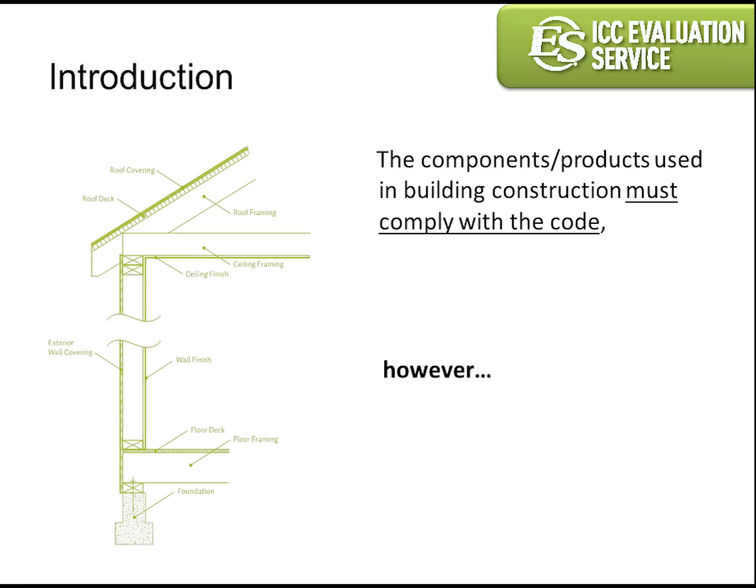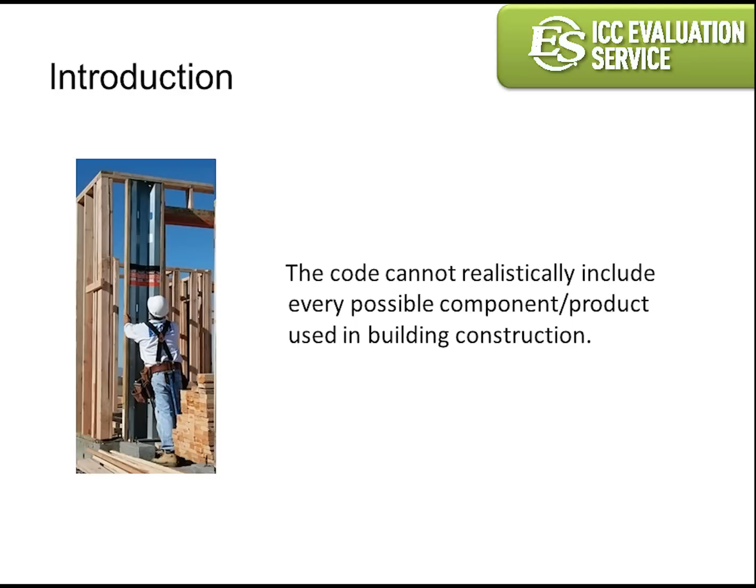The reason is that the building code cannot possibly include every product and component used in modern building construction. If the building code included every possible construction product currently in the marketplace, the code would be unmanageable in size and scope, and maintaining such an extensive code would be very difficult and impractical.

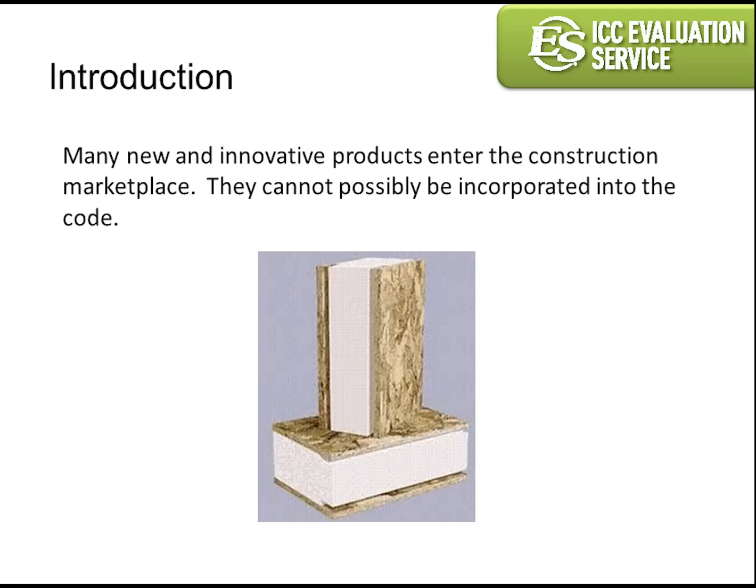Although new building codes are published every 3 years, many new and innovative products continually enter the construction marketplace. There are thousands of manufacturers who produce various new and innovative products that influence and shape building construction trends, but the building code cannot possibly include every product and component used in modern building construction.

If all these products are not specifically covered in the building code or the standards referenced in the building code, then how are they approved for use in buildings?

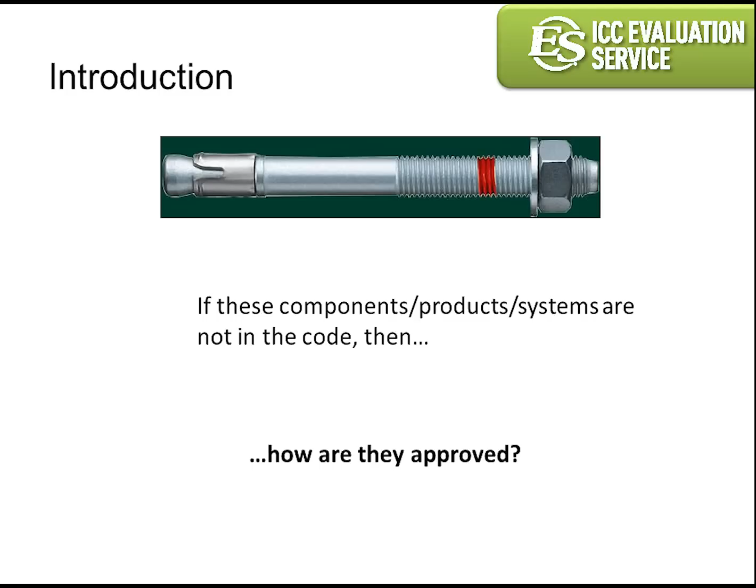I'm sure we've all seen these products used. Some of you may have even specified these products in your building designs, and some of you may have approved these products in buildings in your jurisdiction. So the question is, by what process are these alternative products approved to be used in building construction?

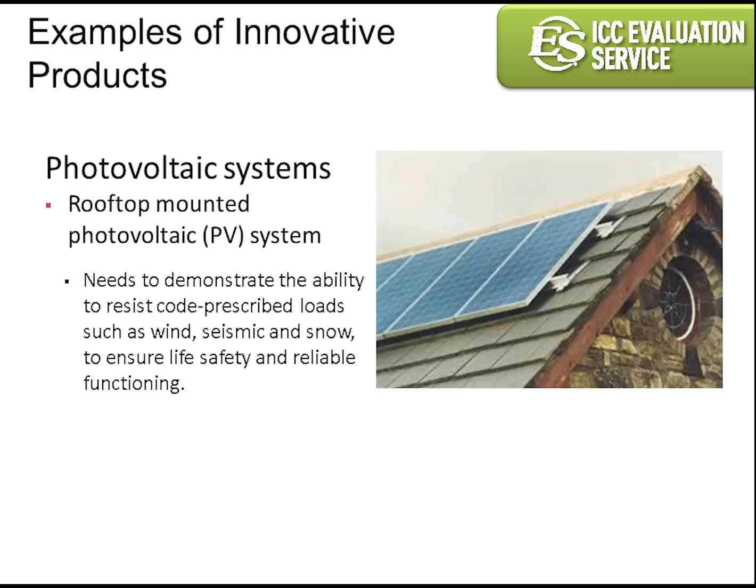A good example of an innovative building product that is gaining momentum in both residential and commercial use is rooftop-mounted photovoltaic systems, referred to as PV systems. PV systems are supported and connected to the structure by a framing system. For life safety issues, it is important that the PV framing system demonstrate its ability to resist code-prescribed loads such as wind loads, seismic loads, and snow loads.

Another example of an innovative building product is the Building Integrated Photovoltaic System, simply referred to as BIPV. This system functions both as an alternative energy-producing system and a code-compliant component of the building envelope.

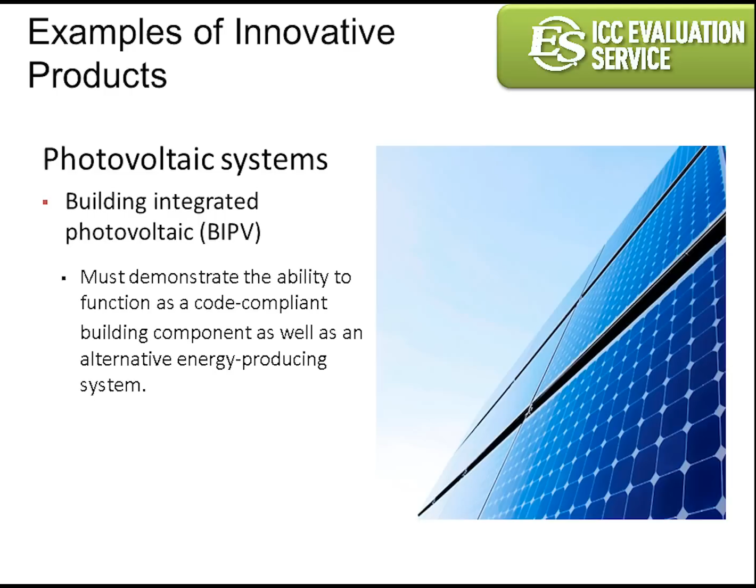Let's start at the beginning with Chapter 1 of the IBC, which contains administrative provisions. Section 104.11 for Alternative Materials, Design, and Methods of Construction states, "The provisions of this code are not intended to prevent the installation of any material, design, or method of construction not specifically prescribed by this code." This means that the building code allows products that are not specifically covered in the code, provided that the material or method is equivalent to that prescribed by the code in terms of quality, strength, durability, and safety.

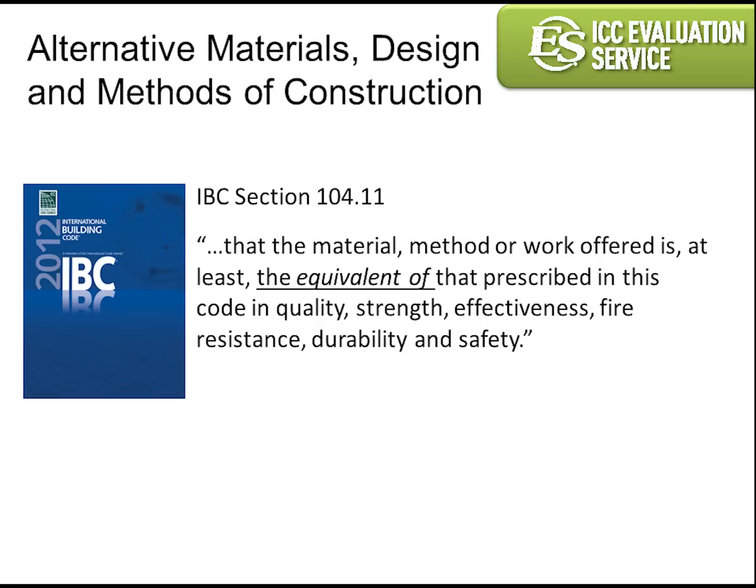And further provided that the alternative has been approved. So the next question is, what does the code mean by approved? Approved by whom? IBC Section 202 defines approved simply as acceptable to the code official or authority having jurisdiction. Section 104.11 of the IBC states that the alternative shall be approved where the building official finds that the alternative complies with the intent of the code.

This leads to even more questions. Specifically, what kind of information must be submitted to the building official in order for the official to determine that a product complies with the code?

The section further states that supporting data in the way of valid research reports from approved sources may be necessary to assist the building official to determine that the alternative complies with the code. What are valid research reports? What are approved sources? Who decides if the supporting data and research reports are valid and from approved sources?

The next question is, who has the responsibility to review and approve research reports and test data for alternative products? The answer is the building official. Section 104.11.2 of the IBC states, the building official shall have the authority to require tests as evidence of compliance.

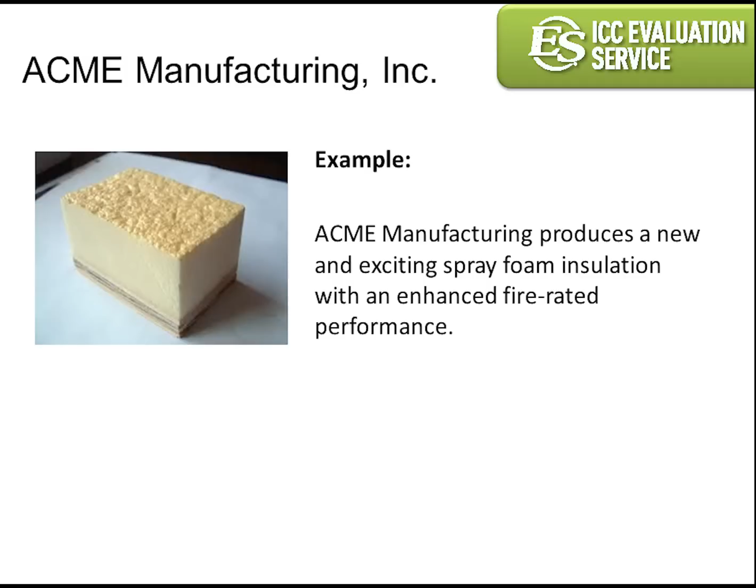According to Acme, their spray foam enhances air quality, is easy to apply, is safe, is energy efficient, and it's economical. However, the burden for the building official is to determine if these claims are true and approve or disapprove the Acme spray foam insulation.

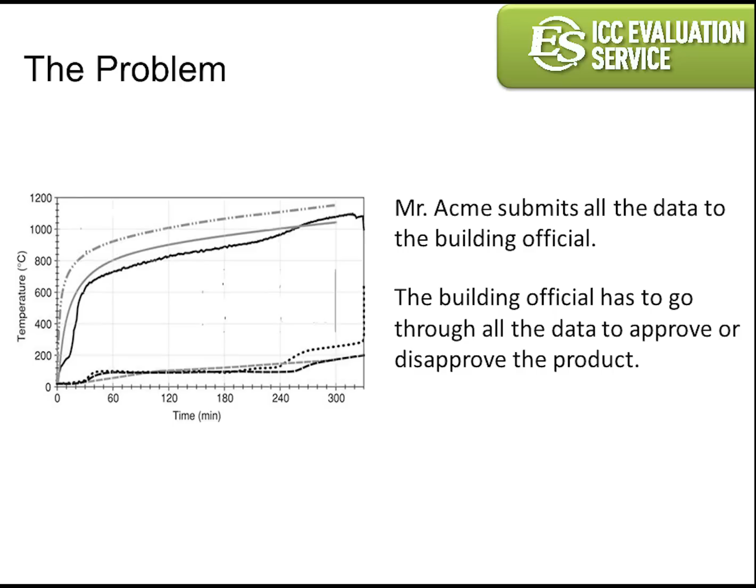In accordance with the code, an Acme representative submits the engineering calculations and test data to the building official. The building official replies, 'What do I do with all this data?' At this point, the building official needs help. Who can help? There is one very simple solution for the building official and Acme.

If Acme Manufacturing had an ICC-ES evaluation report for their spray foam insulation, the building official would not have to review the engineering calculations and raw test data. The engineering and test data would have already been reviewed by ICC-ES staff engineers, and the ICC-ES evaluation report would describe the spray foam product and specify installation requirements, limitations and restrictions that may apply, conditions of use, evidence submitted by Acme, which was the basis for determining code compliance, and an ongoing quality control program with inspections.

This example illustrates how ICC-ES evaluation reports can significantly reduce the burden on the building official and the manufacturer.

ICC Evaluation Service is a nonprofit subsidiary of the International Code Council. ICC-ES has direct access to those who maintain the code. ICC-ES is accredited by ANSI as a product certification body under ISO Guide 65. As a certification body, ICC-ES creates evaluation reports and listings that demonstrate a product's compliance to the codes and standards. ICC-ES has more than 80 years of experience in evaluating products for code compliance.

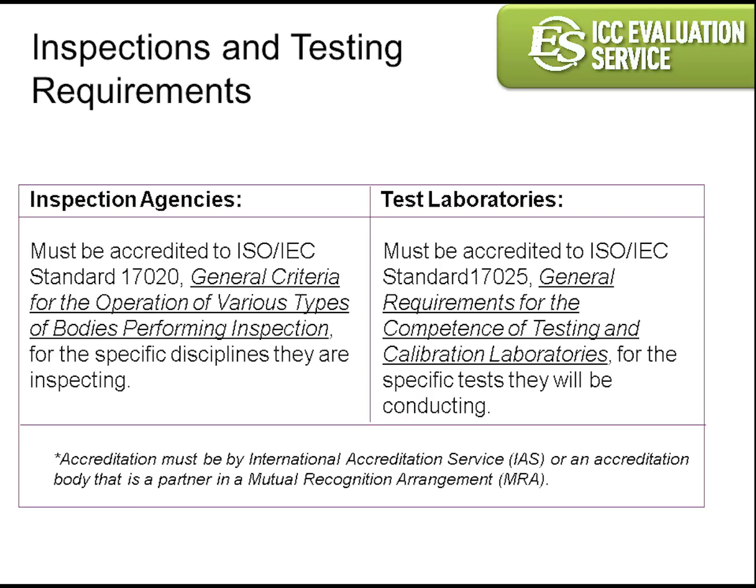The inspection agencies and testing labs used in the development of ICC-ES evaluation reports must be accredited. Inspection agencies must be accredited to ISO/IEC Standard 17020 for the specific types of products that are to be inspected. Testing labs must be accredited to ISO/IEC Standard 17025 for the specific tests that are required.

Another basis for the evaluation of a product is ICC-ES acceptance criteria. Where there are no applicable provisions in a code or standard, or where the code or standard is not clear, specific acceptance criteria are developed to serve as the basis for product evaluation.

The basis used for evaluation is shown in ICC-ES reports under Item 6, Evidence Submitted. Item 6 indicates the acceptance criteria and/or standard used as the basis for evaluation. Acceptance criteria, also referred to as ACs, provide an objective measurement for building products to meet the minimum performance requirements of the code.

ACs are only developed when a product is not clearly covered under the code, when industry raises concern about the product's requirements, or when new criteria is deemed necessary by the applicant or the ICC-ES Evaluation Committee.

How are the ACs developed? ACs are developed by the ICC-ES technical staff in consultation with the report applicant, as well as input from technical experts and interested parties. Three times a year, the ICC-ES Evaluation Committee holds public hearings to consider proposed acceptance criteria.

Proposed acceptance criteria are posted on the ICC-ES website for 30 days prior to the Evaluation Committee hearing to allow comments from interested parties. In some limited cases, the acceptance criteria is balloted to the Evaluation Committee without a public hearing. All approved acceptance criteria are posted on the ICC-ES website for anyone interested in ICC-ES reports.

The final ICC-ES report provides code officials and specifiers, such as engineers and architects, the assurance of technical accuracy, code compliance, consistency, and fairness. A product that has undergone a successful evaluation may place the mark of conformity on the product or packaging. This allows the code officials and specifiers to quickly see that the product has undergone the ICC-ES evaluation process.

ICC-ES newly issued evaluation reports are valid for specified time periods. New ICC-ES evaluation reports are renewed after 1 year. After that time period, the manufacturer has the option to renew for 1 or 2 years. The manufacturer can submit an application to make revisions to the report at any time.

Now let's take a closer look at a sample ICC-ES report. The slide shows the information provided on a typical ICC-ES report.

The Construction Specifications Institute, or CSI, standard filing number is given. The report holder's name and contact information is listed. The subject of the report gives the specific product covered by the report. The scope of the report and applicable codes is indicated.

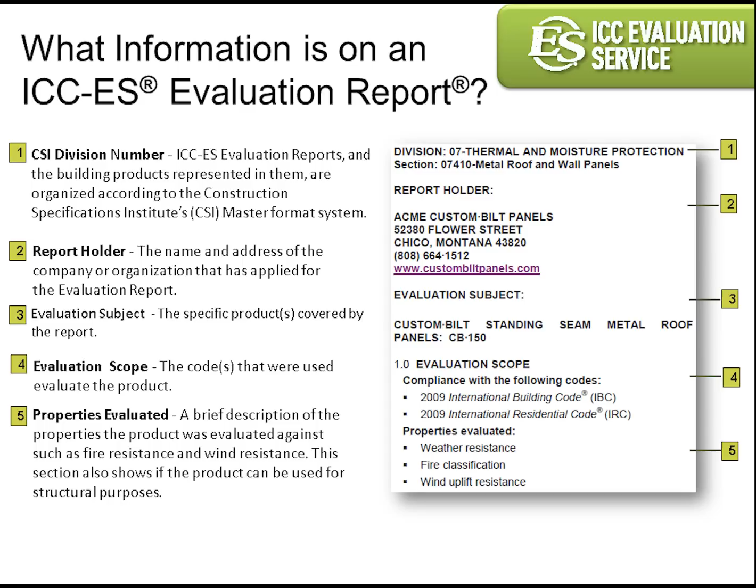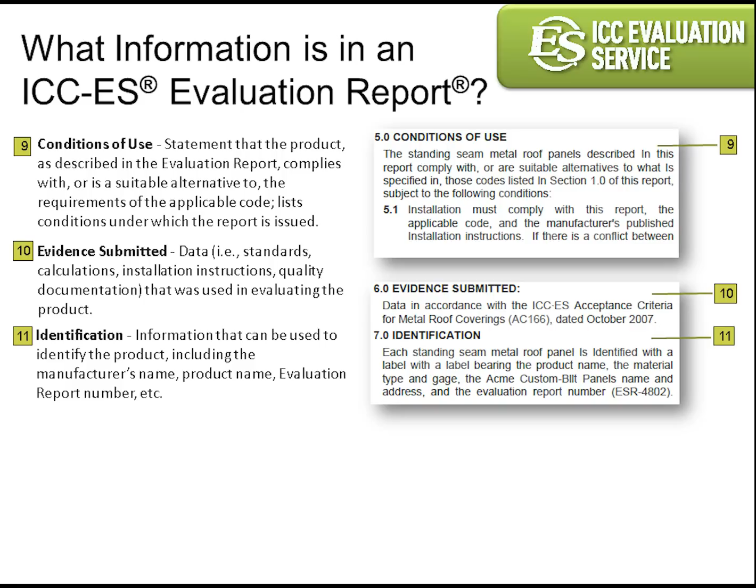The properties evaluated describes the properties that were used to evaluate the product, such as structural, fire resistance, wind resistance, etc. Applicable uses of the product, general product description, installation requirements necessary to assist the inspector and installer, conditions of use for the product, and any restrictions that may apply, evidence submitted for the evaluation of the product, such as test data, calculations, and acceptance criteria, information that may be required to identify the product in the field.

According to a 2010 survey given to building officials by a third-party agency, the majority of building officials in the United States prefer ICC-ES reports for approving alternative materials and building products.

According to Bruce Wilson, Chief Building Official for Cheyenne, Wyoming, whenever someone proposes a product or material that we are not familiar with, we always ask them to provide a copy of their ICC-ES report. Often we find that they do indeed have an ICC-ES report. They were just not aware of it. On other occasions, we simply do not approve a product or material until they provide us with a valid ICC-ES report.

ICC-ES evaluation reports can be beneficial to many parties, such as code officials, product manufacturers, and product specifiers, such as engineers and architects. The benefits will vary depending on the user.

The benefits of ICC-ES evaluation reports to the code official are: ICC-ES provides expert technical support to the building department for evaluation of products. The building official can have confidence that the product complies with the intent of the code. For more than 80 years, code officials have been able to rely on ICC-ES as a trusted and reliable source.

ICC-ES evaluation reports save time by reducing delays during the plan review and permitting process. They ease the burden and save time for the building official because they significantly reduce the time the building department staff spends evaluating all the test data and engineering calculations in order to determine if a product is in conformance with the code. The building department will not need to turn to multiple sources of information. ICC-ES provides one consolidated report on the product.

The ICC-ES PMG listing program assists code officials and industry professionals in determining whether plumbing, mechanical, or fuel gas products comply with applicable codes and standards.

Some of the codes and standards that are used in evaluating the PMG products are the International Plumbing Code, Uniform Plumbing Code, International Residential Code, International Mechanical Code, Uniform Mechanical Code, International Fuel Gas Code, ASTM, ASME, ASSE, UL, and

ASHRAE. Some of the items to look for in a PMG listing: manufacturer name, product description, the list of codes and standards used to evaluate the product, listing criteria, installation instructions, conditions of listing, and the mark of conformity.

The ICC-ES environmental program offers manufacturers a way to have their building, plumbing, mechanical, or fuel gas products evaluated by a third party for sustainable attributes.

With the ICC-ES VAR environmental report, manufacturers have their products evaluated for compliance to green codes, standards, and rating systems. A successful evaluation results in the product being issued an ICC-ES VAR environmental report.

Some of the codes, standards, and green rating systems that are used in the evaluation include the International Green Construction Code, California Green Building Standards Code, ASHRAE 189.1, NAHB and ICC's National Green Building Standard, LEED, Green Globes, among others.

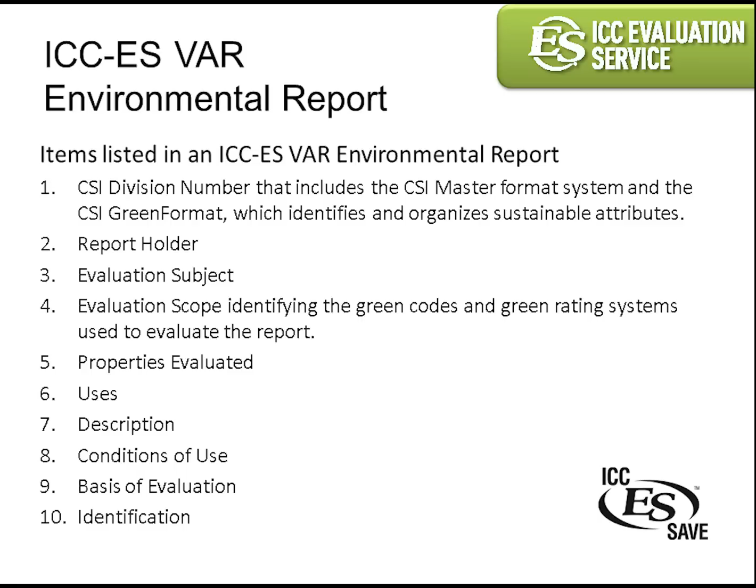It will also provide a chart showing the eligibility of compliance to the green rating systems, standards, and codes.

In 2010, the California Green Building Standards Code was released to help meet California's goals for greenhouse gases and emissions. It is written with both mandatory and voluntary language.

The International Green Construction Code, IGCC, was developed to reduce the negative impact and increase the positive impact of the built environment on the natural environment. IGCC addresses natural resources, materials, water, and energy conservation, as well as indoor environmental quality and comfort.

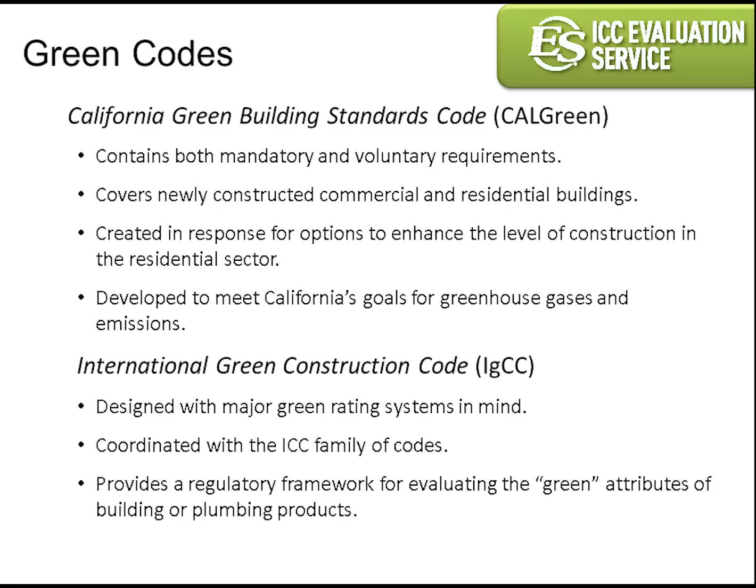The IGCC was released in April 2012. All products that have gone through a successful evaluation in each program are allowed to use the applicable ICC-ES trusted mark of conformity, showing that the products are compliant.

ICC-ES offers various tools that assist building officials, architects, specifiers, contractors, and any other interested party to easily find a product that has been evaluated for code compliance.

The ICC-ES website offers building officials and all interested parties a way to look up products that have received an ICC-ES evaluation report or listing at no cost.

Another tool that assists building officials in approving building products is eCodes Premium. eCodes Premium is an electronic portal through which code and other reference books can be accessed or downloaded from a computer or

smartphone. This service provides access to the ICC-ES evaluation reports and PMG listings, which are embedded within the international codes so that code-compliant products can be quickly identified. Code officials and specifiers can easily look up the section of the code that applies to the report.

Through the Building Department Service, ICC-ES provides assistance exclusively to building jurisdictions. This service assists building officials in approving building products in the field.

The Building Department Service saves building officials time by providing them with an independent technical review on a product that has been presented to them in the field.